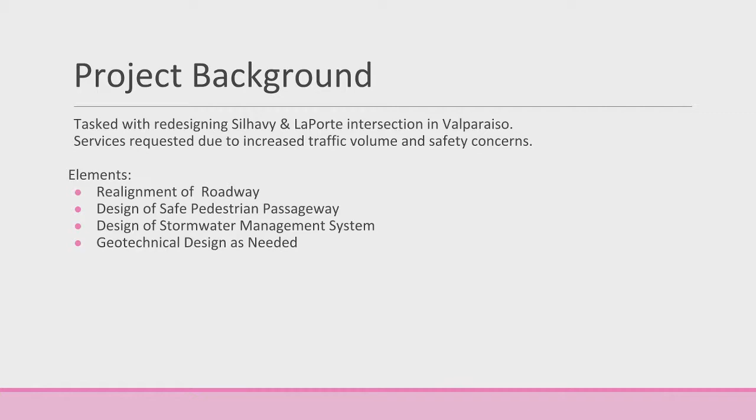With that goal in mind, we broke down our project into four main elements. These include the realignment of our roadway to be handled by our transportation engineer, design of a safe pedestrian passageway handled by me, our structural engineer, design of a stormwater management system handled by our water resources engineer, and geotechnical design as needed to support the other disciplines.

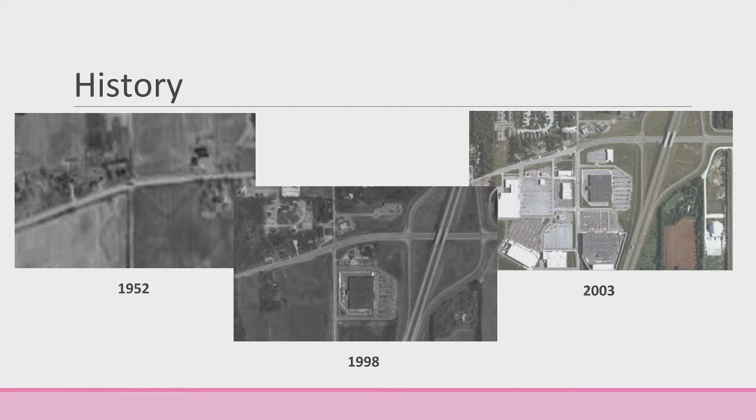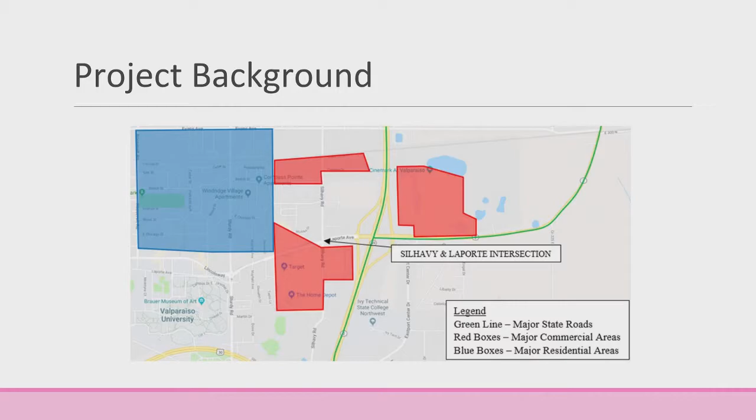Moving on to 2003, you can see the Valparaiso Walk and Valparaiso Marketplace commercial areas have been completed. There was no expansion of the roadway at this time, and that's where much of the additional traffic volume came in. So taking a further zoomed out look, you can see the project site, Silhavy and LaPorte intersection, is located on the east side of the city. Valparaiso University is right down here. It's in close proximity to State Road 49, which runs north-south, State Road 2, three major commercial areas as seen in red here, and a major residential area seen in blue. And with that, I'll hand it off to our geotechnical engineer, Roberto.

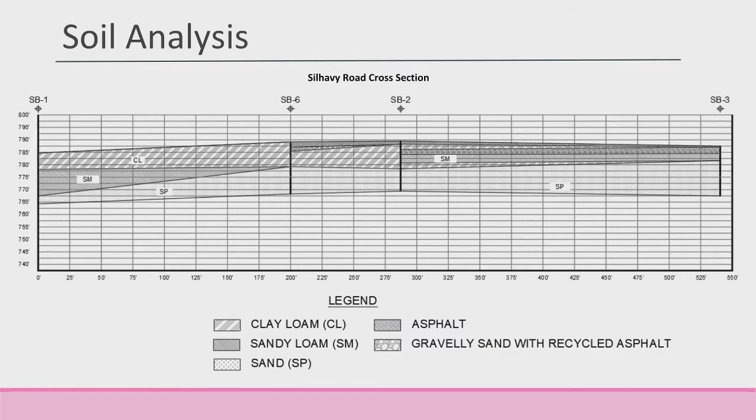Thank you, Nicholas. Now, before designing, we conducted a soil analysis to determine what soil types and soil parameters we were going to work with at our site. This was completed utilizing soil boring logs provided to us by the owners, whereby we determined that the composition was primarily a clay loam, around 6 to 11 feet, and sand around 20 to 35 feet, depending on the soil borings. Now, this is just a figure showing how we utilized the data to construct a figure that was easier to understand, where it just gave us the elevation of each soil layer. Now, with that, I'd like to pass it on to our transportation engineer, Lauren Zeeb.

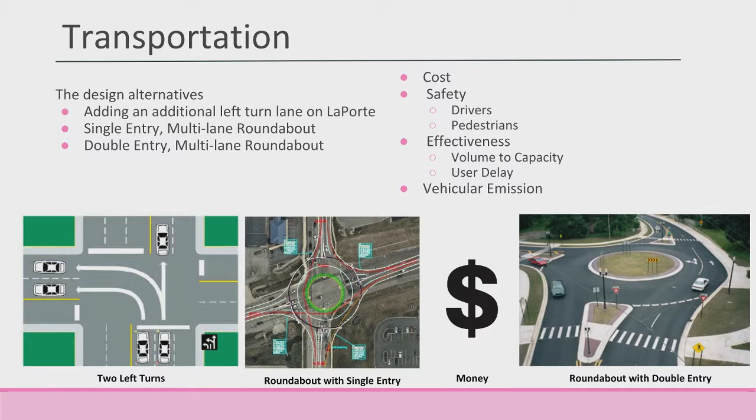Thank you, Roberto. So with the transportation aspect, a few different design alternatives were considered in the first semester. So here you can see this roadway has two left turn lanes, so that was one of the alternatives looked at, adding an additional left turn lane on LaPorte Avenue on both sides of Silhavy. And then another alternative was a roundabout with a single entry and then two circulatory roadways. And then lastly, the one that we chose to do was a roundabout with double entry lanes and then two circulatory roads in the middle.

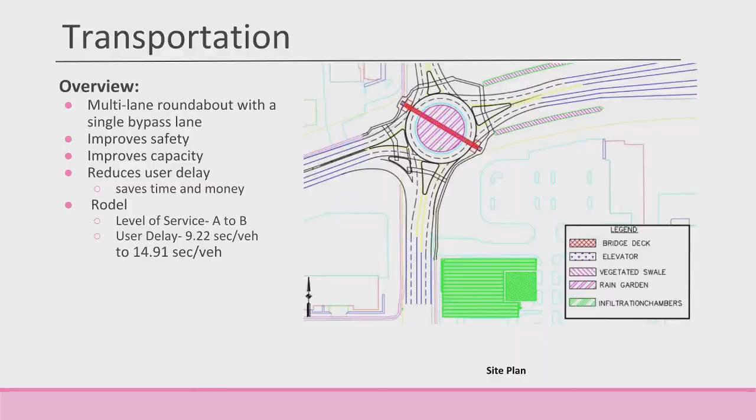This roundabout design improves safety, capacity, and it reduces delay, so it helps save time and money. Rodel was a computer program that was used to help determine the level of service for both the construction year and also the design year, which is 20 years out in the future. And so the roundabout goes from being a level of service of A to B, which is totally acceptable over a 20-year lifespan, and the delay goes from about 9 seconds per vehicle to about 15 seconds per vehicle.

The biggest question I wanted to answer was why a roundabout? Roundabouts are safer than a regular signalized intersection, and the biggest reason why is because there are less conflict points. So as you can see here, there are only 8 circles, so those are those 8 conflict points, whereas an intersection has 32.

Roundabouts are safer, but that doesn't mean there aren't any accidents, they're just less deadly. So you don't have a T-bone occur in a roundabout. It's usually fender benders, things like that, so they're a lot safer that way. And as you can see in this chart here, it's just comparing different countries and the percent reduction in all crashes being 35%, and then 76% in injury crashes.

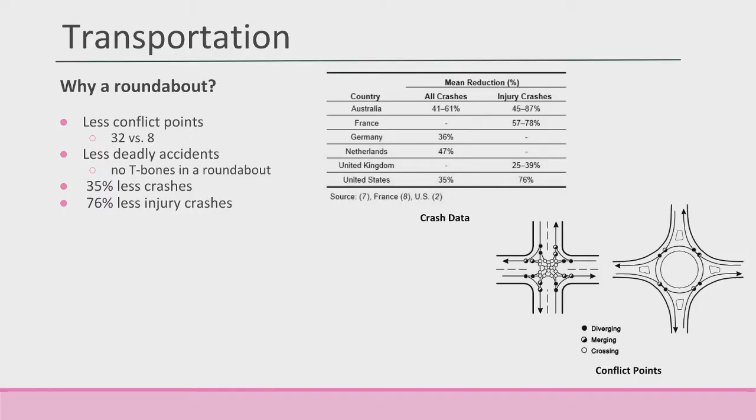And then, for it to actually be built, there were a few different considerations. A maintenance of traffic. So there are 2 different phases that I came up with. One being the north and west side being completed first, so that would be closed to construction and the traffic would flow east and south. And then once the north and west was totally constructed, it would flip, and then the east and south would then be closed to complete the roundabout.

And then also what was considered was a truck detour. With construction zones, they're usually smaller to allow for safety for the workers and everything. So getting a truck through a construction zone is not the most ideal situation. So the trucks that were considered were those coming off of State Road 49. And so basically what would happen is they would have to continue all the way to the US 30 exit and then onto US 30.

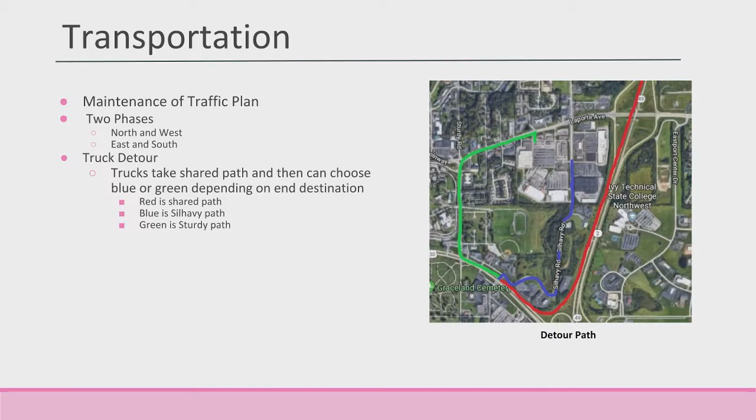And then they have 2 different choices, whichever one they want to choose. They can take this green path, which will have them turn left onto Sturdy Road, go through the other roundabout, and then continue onto LaPorte Avenue, and then they have access to this commercial area. Or they can go up to US 30 and turn right onto Silhavy Road and follow this windy path, which also leads up to the commercial area. The green path is the ideal path because there's less curves for a truck.

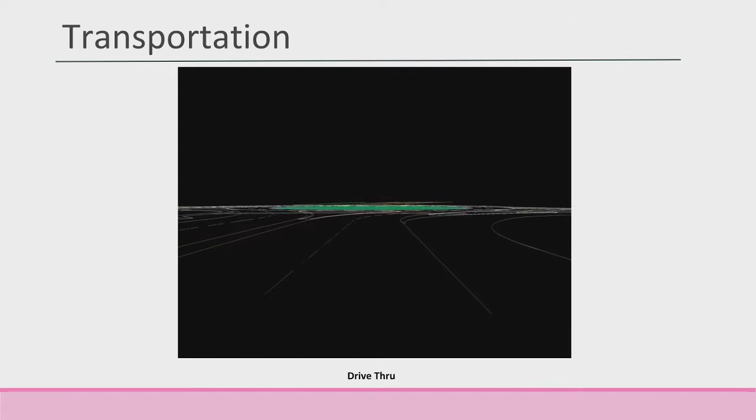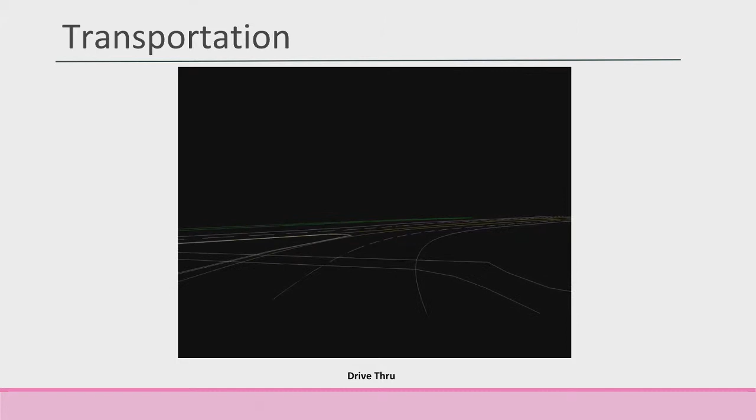And then lastly, this is a little drive-through of the roadway. And so basically, you're just driving through the outer lane of the roundabout, and then you are now entering the roundabout, staying in the outer lane, following along, and then you are exiting again in the outer lane as well. And then that's it. And then with that, I will pass it off to Nick, our structural engineer.

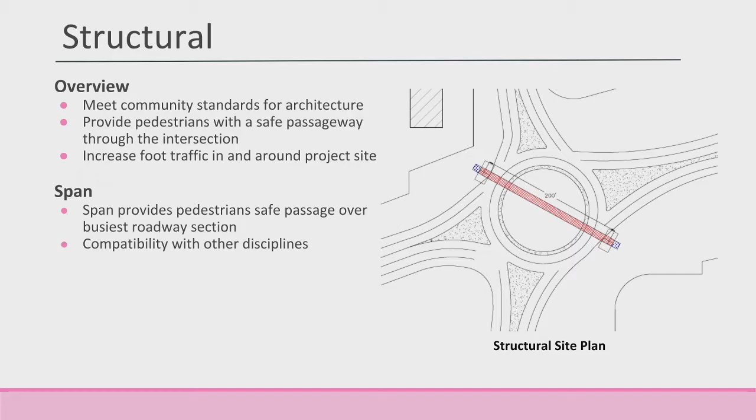Thanks, Lauren. As the structural engineer, my main task was to develop a safe pedestrian passageway. The other main goals handed to us by the city were to meet community standards for architecture, provide pedestrians with a safe passageway through the intersection, and increase foot traffic in and around the project site. So currently, as this intersection is signalized, it's not a very attractive intersection for pedestrian and foot traffic. So one of the main goals with the structural discipline was to increase this traffic in and around the site.

I considered multiple span alternatives, but wound up settling on a span that goes from the northwest to the southeast of the site. This span provides pedestrians a safe passageway over the busiest roadway section, which is LaPorte Avenue, and it's also compatible with the design of other disciplines.

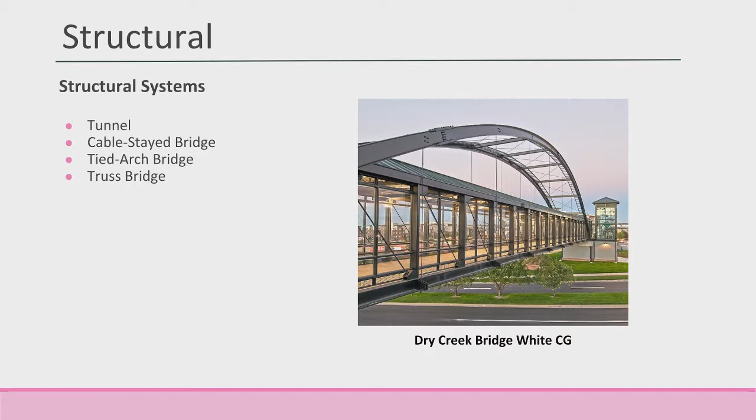I also considered 4 structural system alternatives. These included a tunnel, a cable-stayed bridge, a tied arch bridge, and a truss bridge. My ultimate deciding factor for determining a final system was aesthetics, and this is a structural example that I used. It's a Dry Creek pedestrian bridge in Denver, Colorado, which was an effective solution for that project site.

So moving on to the tied arch system, first of all, it's compatible with other disciplines. It's also an aesthetic design. And one unique thing about this arch system compared to other traditional arches is that the actual arch doesn't transfer any lateral loads into abutments. Traditionally, abutments are constructed with earthwork, and lateral loads from the arch are then transferred into the ground through these abutments. In this system, the lateral loads are transferred directly into the deck.

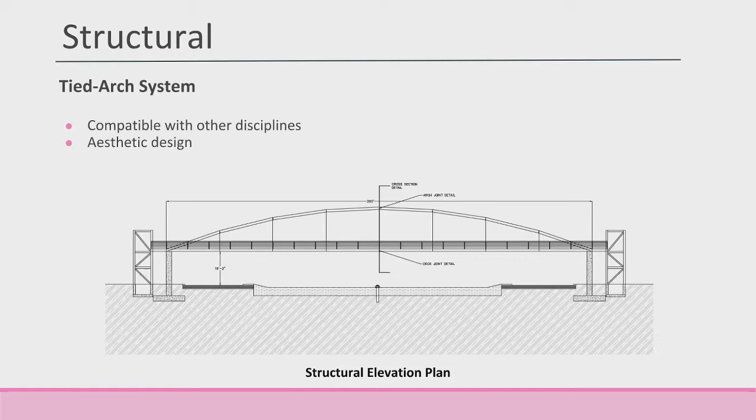So all substructural elements, which are the bridge columns, only have to handle vertical forces. This decreased the amount of land that we had to acquire for the site and allowed our supports to be effective in a very limited area. Additionally, we used elevator bridge approaches as opposed to ADA compliant ramps. These elevators are, of course, ADA compliant, but ADA compliant ramps required such a gradual slope that it would have required additional land acquisition.

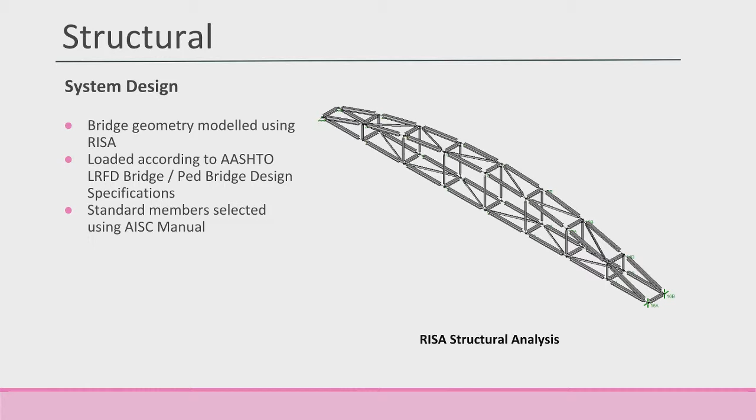So once the bridge geometry was determined, it's a 200-foot arch span. The geometry was modeled using RISA structural analysis software. This was then loaded in accordance with AASHTO LRFD bridge and pedestrian bridge specification standards. These are national standards which dictate the type, magnitude, and combination of loading onto bridge structures. And then finally, based on these loading conditions, standard members were selected using the American Institute of Steel Construction Manual.

And with that, I was able to develop an effective pedestrian passageway system that was compatible with all sub-discipline designs. Now I'll hand it off to our water resources engineer, Jenna Meert.

Thank you. Okay, so I designed all of the stormwater management systems for the site. And so anytime you redesign a site, you have to meet the new city ordinances and drainage standards. So those primarily broke into two different volumes of water. One, a flood control volume that had to be detained on the site to prevent flooding downstream, and the other, a water quality volume, which needed to go through certain treatment processes to remove total suspended solids, which is just sediment in the water, as well as certain nutrients like phosphorus and nitrogen to prevent algae blooms downstream.

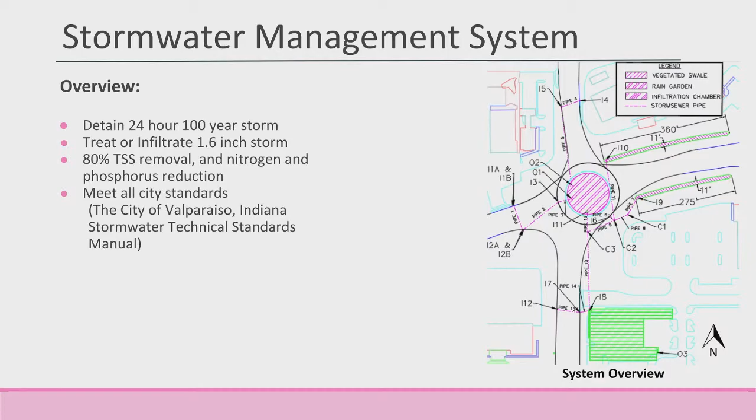So just an overview of the system we had. It was 4 main components. So there is the piping system that collected the water along the roadway and transported it between the different elements. There are 2 vegetated swales along the eastern portion of the roadway, a rain garden in the center, and some underground infiltration chambers here. The water quality volume was primarily treated using the vegetated swales and the rain garden, and the infiltration chambers were primarily for that flood control volume.

So this is just an overview of the watershed used. So any water that falls on that shaded region was the responsibility of our stormwater management system. And the different colors just show which element of the system the water went to first.

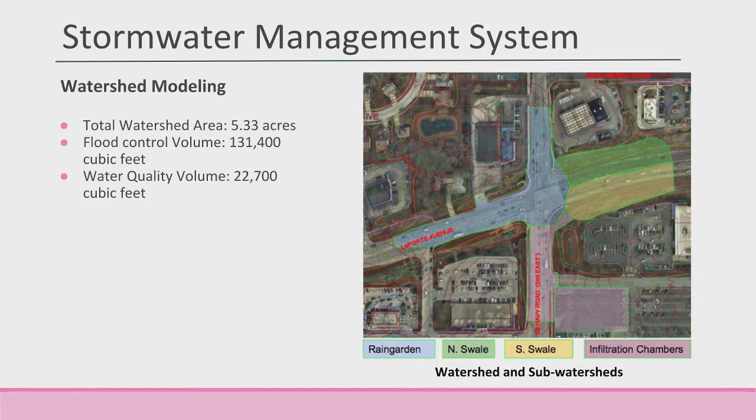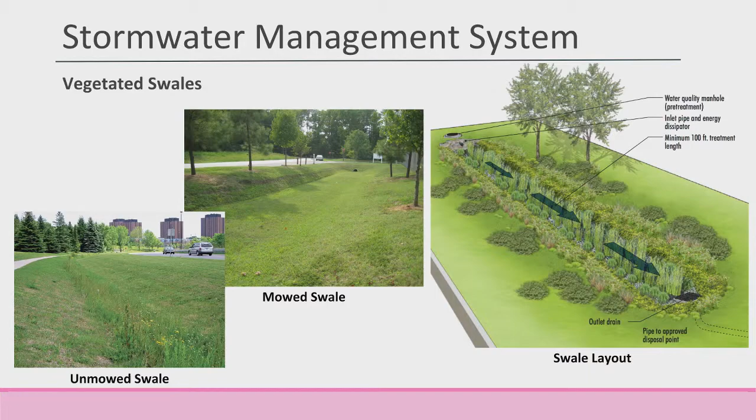So this is kind of a schematic of what the vegetated swales might look like. We designed them for the mowed condition in case the owner preferred that aesthetic or that type of maintenance. But the unmowed swale like this is more recommended because it treats the water better, it slows things down more. So the water would come off of the roadways and down the swale and then overflow into the storm sewer system.

This is an overview of the rain garden in the center of the roundabout. So it has the side slopes and then a ponding area in the middle. We also were bringing water into the rain garden through concentrated pipes from that storm inlet system. So that water had to be redistributed out so that there weren't erosion problems. So we have 2 level spreaders in the rain garden as well, just to spread that flow back out.

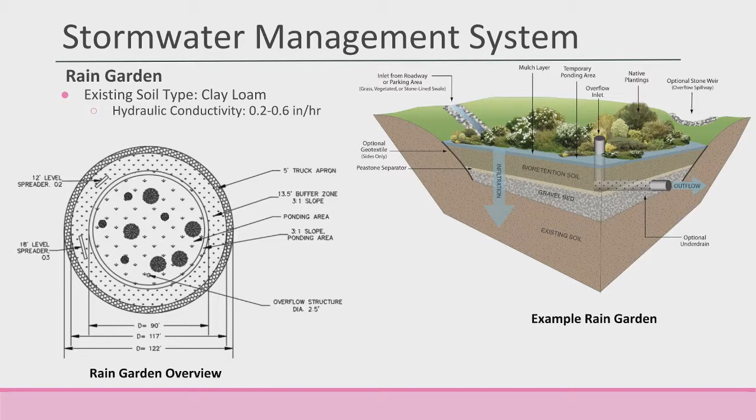And then the soil in this area was not compatible for infiltration. So we have an underdrain system similar to this one shown here to collect the water at the bottom of the rain garden. And then the final component are the underground infiltration chambers. And this video is just going to kind of play as I talk, showing you how they operate.

But the infiltration chambers go underneath the parking lot. The parking lot we selected is shown here, north of Noodles and Company and south of Aldi, and here's the intersection. And we did this primarily because there's not a lot of area around our intersection for traditional detention. So going underneath the parking lot gave us space to detain this water.

So the water goes through under into the chambers, and then it kind of fills those chambers up and will infiltrate back through. And so we'll let the video play. It'll show kind of the overflow system as well. So it fills this first chamber first, and that's wrapped in a geotextile to help remove additional sediment. And then it will overflow, as it's about to show.

I'm a little ahead of my video there.

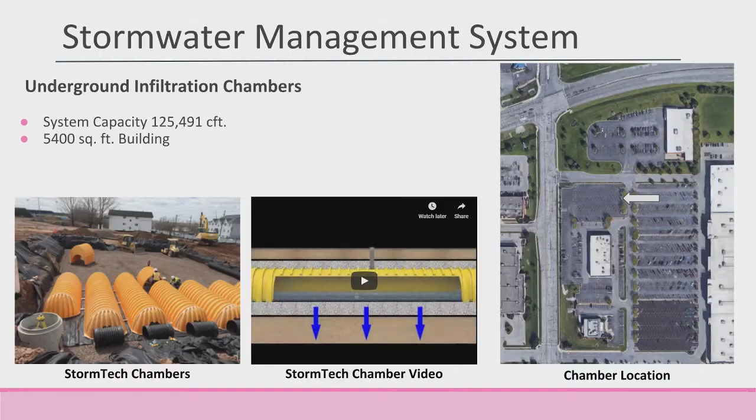Overflow into the manifold system for a larger storm so that it just disperses into the chambers more quickly. And then it would eventually outlet if necessary, but that's only going to be necessary for the much larger storms. And then we also chose this parking lot because it's not used very much right now.

We made an agreement with the landowners to put an area for future development in the parking lot, so there is a space available for about a fast food sized restaurant if they decide to develop it in the future. But for now, it's not too much of an economic problem to decommission the parking lot temporarily because we can replace it, and it's not being used currently. So with that, I'm going to pass it off to our geotechnical engineer, Roberto. Thank you.

As our structural engineer, Nicholas Schur, mentioned previously, the scope for the geotech was to assist in the other disciplines, which resulted in designs of the pavements for the roadway and the parking lot, the bridge foundation, and the elevator pit, which included a foundation wall and slab.

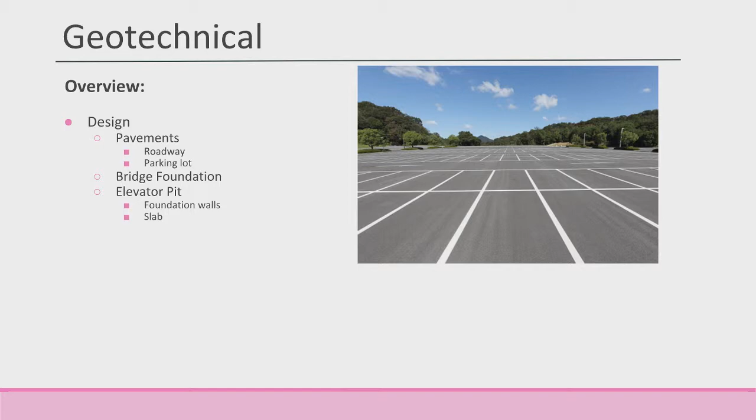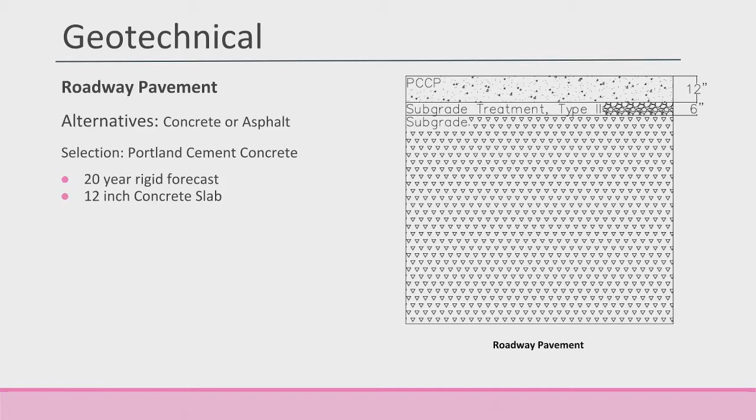Now for the roadway pavement, we initially looked at either using a concrete or an asphalt. An engineering decision was made, and we chose to go with a concrete. So the selection was a Portland cement concrete. We designed it for a 20-year rigid forecast, and that resulted in the slab being 12 inches thick. In this elevation view, you can see the 12-inch slab has a subgrade treatment of type 2, which is just 6 inches of the subgrade replaced and substituted with an aggregate, which would assist in the whole design.

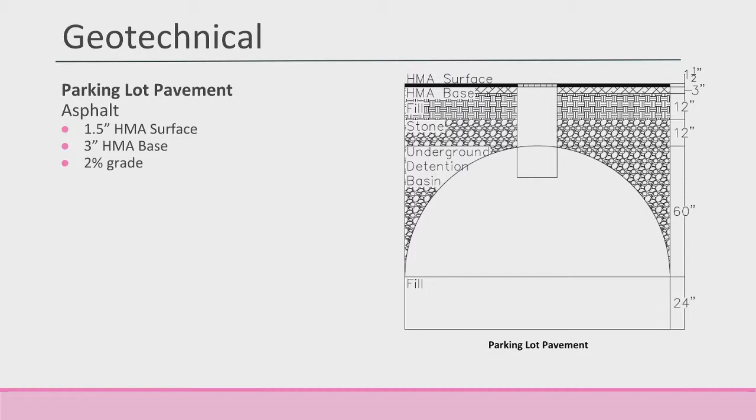For the parking lot pavement, we stuck with asphalt, and we designed it with a hot mix asphalt or HMA surface, and under that would be a 3-inch HMA base. We applied a 2% grade onto it so that the runoff could go into the underground infiltration basins that our water resource engineer talked about earlier in the presentation.

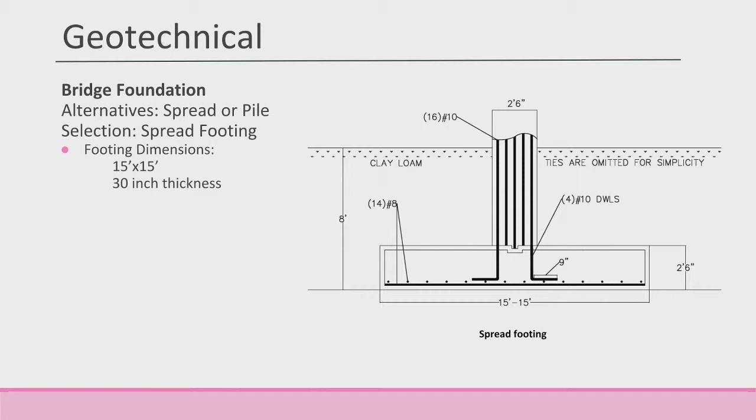Now for the foundation, we were looking at either using a spread foundation, a spread footing, which is in this image, or piles, which are just driven into the ground, where the structure would be placed on top of. When we calculated the results using the parameters of the soil, it resulted in the base being 15 by 15 and having a 30-inch thickness.

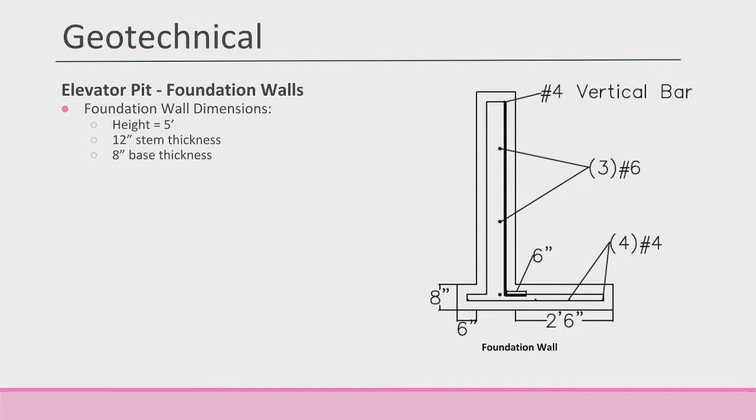For the foundation walls, it was an added scope for the elevator pit later on in the project, so there weren't really any alternatives that we looked into. We designed the foundation walls as retaining walls, and utilizing the soil parameters once more, we determined that the stem height would be 5 feet, the thickness of the stem would be 12 inches, and the base would be 8 inches. For the slab, the sizing was based off average elevator shafts, so that gave us a 9 by 9 slab, which was 6 inches thick and would be placed on top of those foundation walls.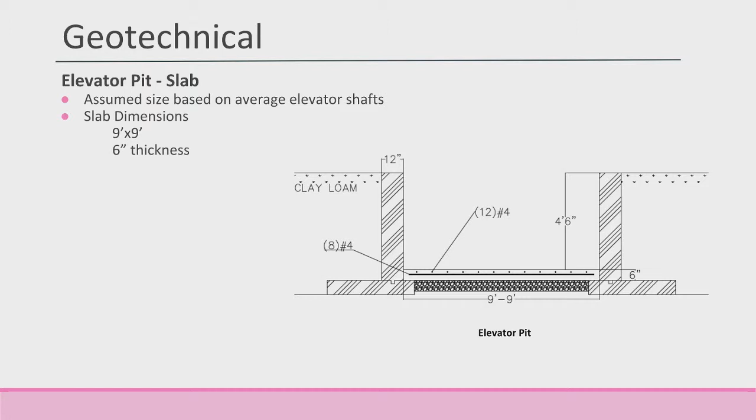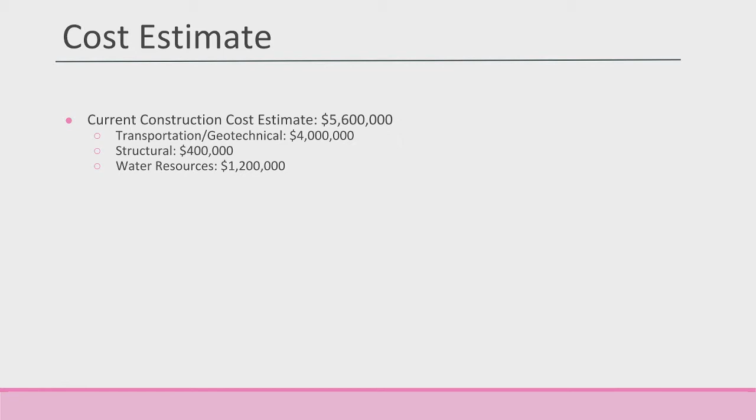And with that, I will talk about the construction cost. We estimated it to be about $5.6 million, with the breakdown shown here. The transportation and geotechnical shared the cost, being around $4 million. The structural, $400,000, and the water resource, $1.2 million.

And with that, I would like to invite the rest of my group up for any questions, and thank you guys for listening.